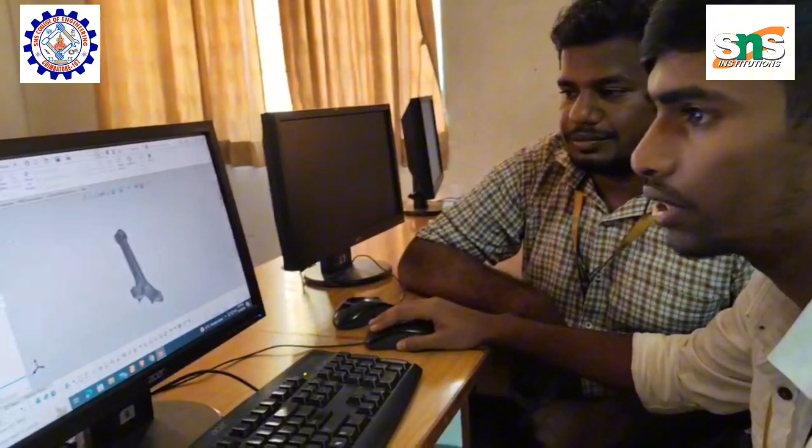We are taking this component, a connecting rod of the system. We have to first save this file as IGES format.

Then we have to open the workbench in ANSYS. In this ANSYS we can do many things. We can find how much stress is applied in this area and this part. We can find out how the material should be, select the material property, and pretty much everything else with this ANSYS software.

Now it's opening. We are going to see static structural, so I'm going to select this one. Then for everything it should have a green color tick mark. Engineering data we can keep as default.

Now we are going to select the geometry data. We have to import the geometry, so we go to browse and start importing the geometry.

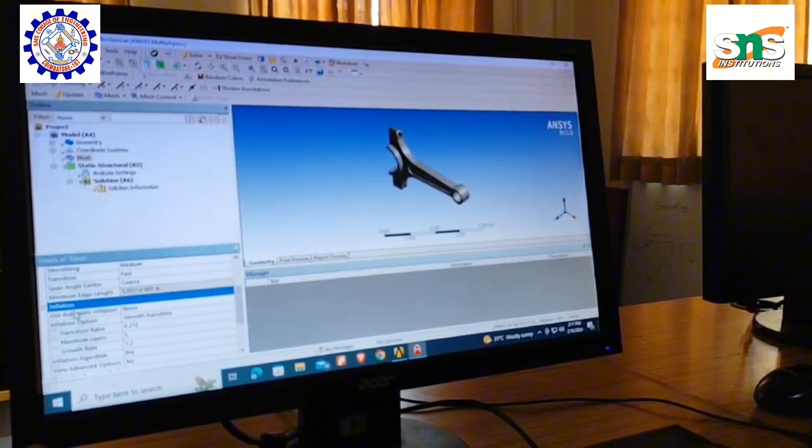Now it has come, we have to select the mesh. We can keep the mesh as any value we want; I'm going to select 3 as the mesh value. We can cross reference this to check everything is correct. Mesh is okay, now we should select this one.

We have to right click the mouse and insert, select force, and decide how much force will act on which surface. In geometry, select the geometry and apply.

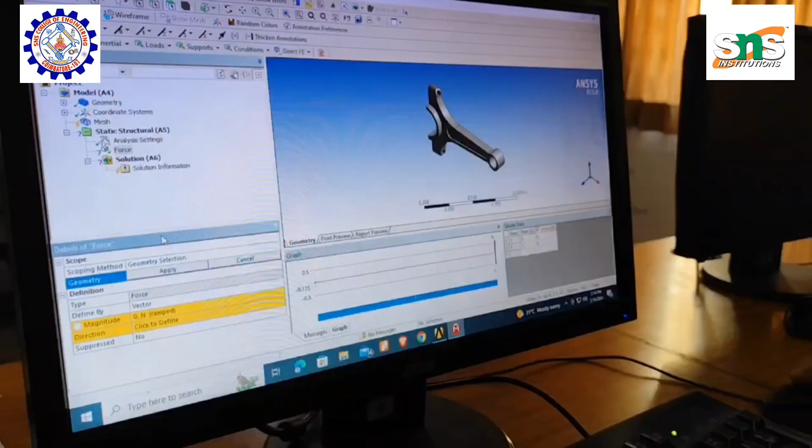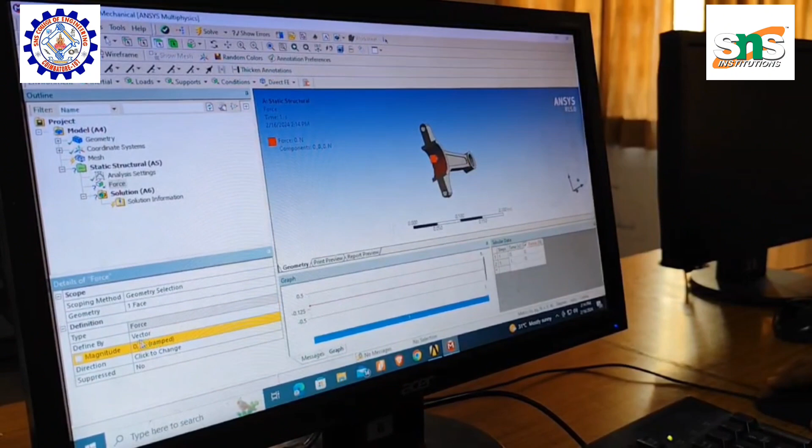In static structural, we select and insert the force, and it will come like this. We select this geometry, then choose the area where the force is applied, click apply, and set the magnitude as 1000 Newton. Then we set the direction where it will act.

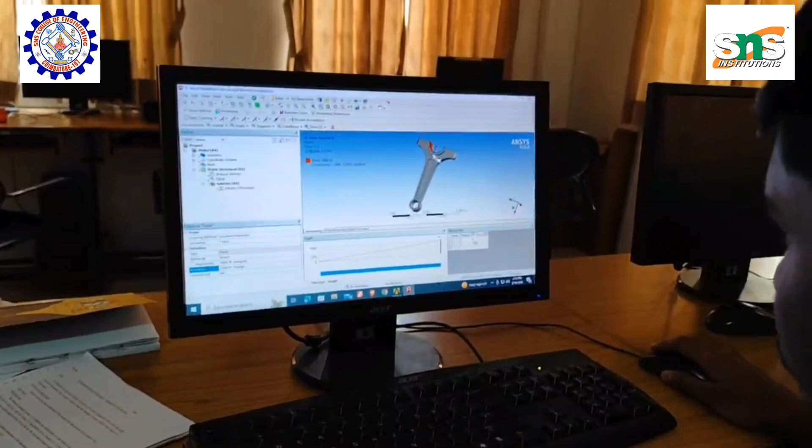You can keep it here; if you keep it here, it will come down. Apply. Then the force will act laterally.

We can select many number of forces. For example, I am selecting only one type of force now.

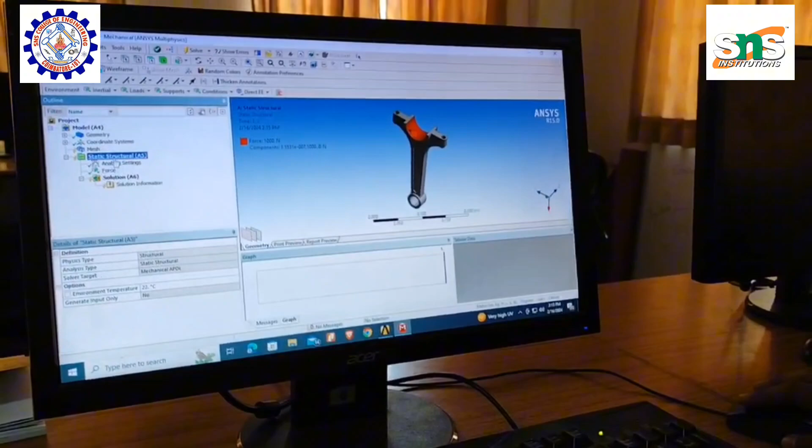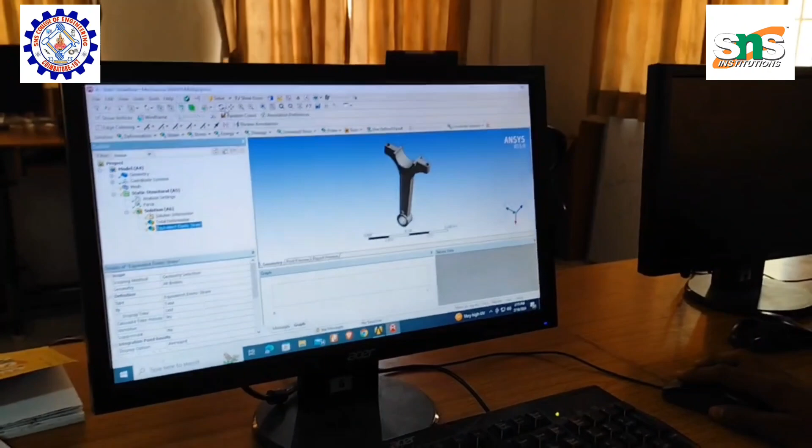In solution, we can check the deformation tool and strain tool, and many other things. I am selecting total deformation and stress-strain equivalent. Then I click the solve button, and it will solve.

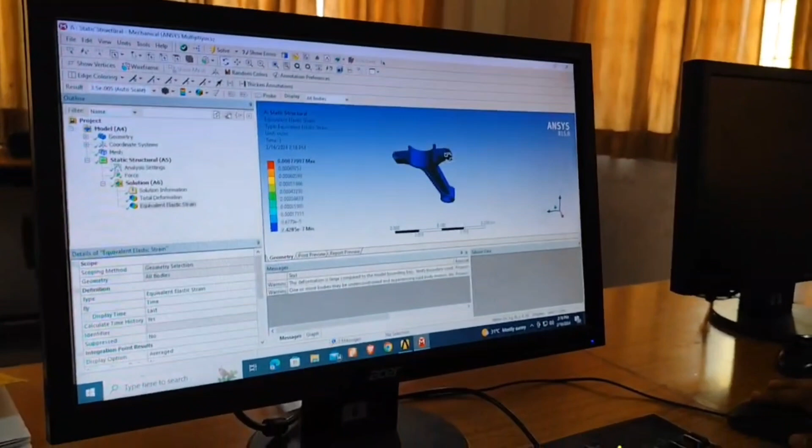In equivalent elastic strain, it only acts on these hinges. In total deformation, we can see it is acting on this one, and later it is decreasing. That's it, this is the ANSYS analysis process for static deformation and those things.